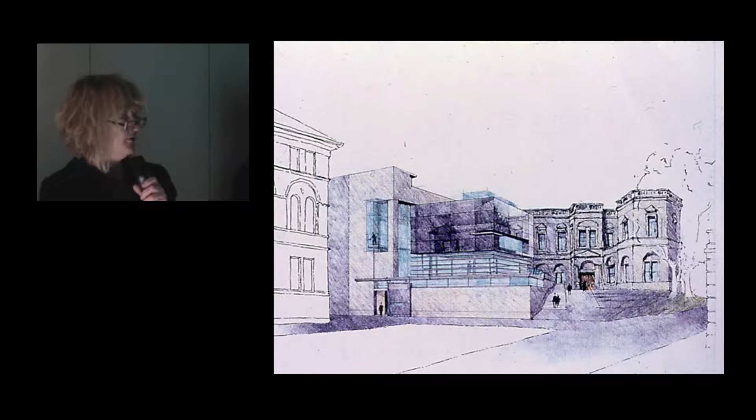In our first project in Trinity College, for a Department of Mechanical and Manufacturing Engineering, in developing the brief, there was an element within the programme that didn't have to be ground-based. So we took that element, which was an acoustic laboratory, and raised it above the podium, making a symbolic gesture to the campus in terms of this particular department. And at the same time as we were developing this project in Trinity, we were also working with structural engineers in the development of motorway bridges. And what we found through that work was the capacity of large-scale structure to influence space.

This is the entrance porch of a school that we have completed in Galway. And what's significant for us, and why we're presenting it to you tonight, is that it holds 2 pieces, it frames 2 parts. One is the landscape, the groundscape, and the other is the sky. And for us, the interesting point of this place is that within our work, the issue of anchoring to the ground, to the topography, is critically important. And also that the relationship to the sky is the opportunity to allow animation, to make connections and to capture movement.

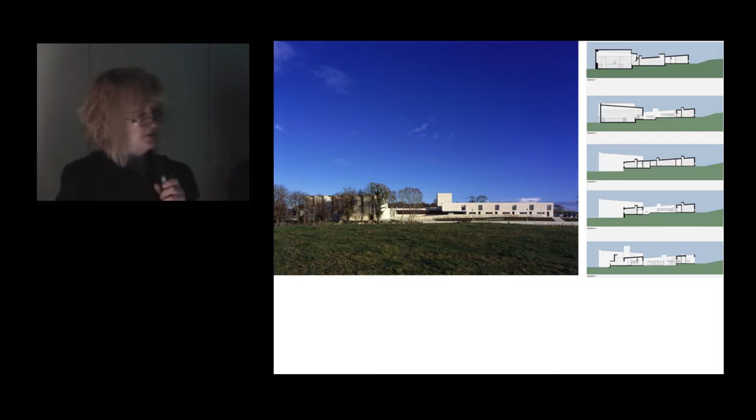This is the same school, but looking at another aspect of it. It takes the hillside and carves the topography on the ground, and also carves the topography of the roof. And in the project, we brought the space of the landscape into the body of the school itself. In this image, this is really dealing with very restrictive budgets in essentially radically important landscape locations. And what we have found is that the choice of the construction is critically important in the making of the space. And sometimes the construction method is the starting point in terms of design.

So essentially tonight, we are focusing on our project in Milan, the Bocconi University in Milan, because we feel that it amalgamates these issues that I've talked about in terms of grain, symbolism, major structure. So we will go through in detail tonight the Bocconi project.

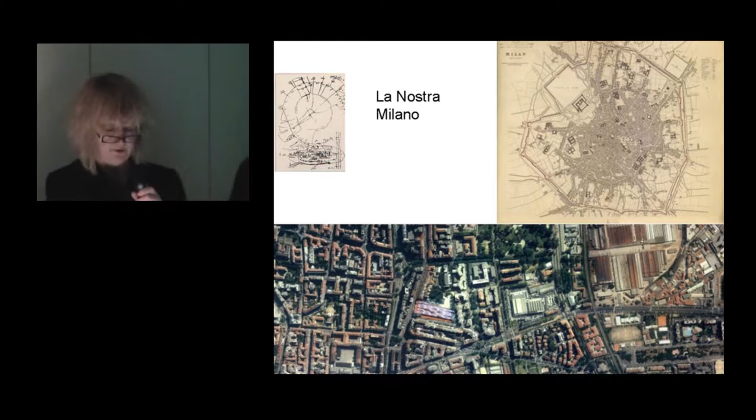The title La Nostra Milano, it's not meant to be proprietorial, but Yvonne was just mentioning that we've worked in Dublin most of our practicing lives, and the prospect of coming to a new city and building a building in a new place as foreigners was very challenging to us. And what we felt was that in order to make a building of this place and in this place, we had to somehow take ownership of Milan as a city and let it get under our skins, so that we were no longer strangers to the city. So what we're going to tell you is a sort of story of 5 years' work in the city, but trying to touch on the key preoccupations that we have in our work.

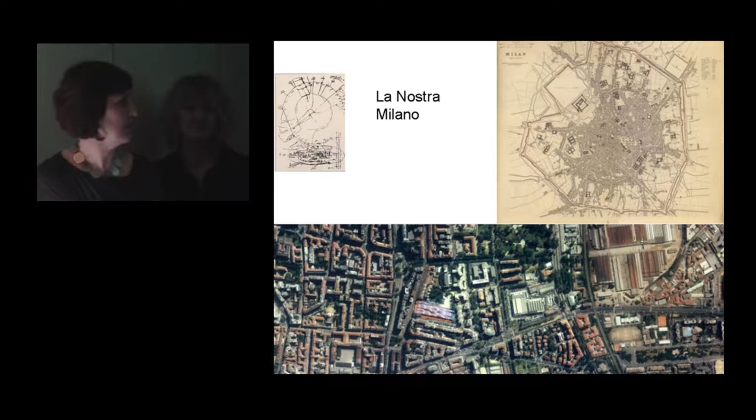The site for the Bocconi project, this is our competition model set into the context of the city. It's just outside of the Spanish Walls, about 20, 25 minutes walk south of the Duomo. Unlike Trinity College, it's not a gated university, and we were one of 10 competitors, and we're really honoured that Laurent Boutouin has attended here this evening, because he was one of the competitors and made a beautiful project, which I'm sure he felt should have won. But we're really happy that he has come here this evening. All of the architects that were part of this competition were architects whose work has inspired us hugely in our own working lives. And just describing this process of coming to Milan, not just as a tourist, but with the challenge of trying to make a building.

And before we came, we obviously had a brief and had done some work, and there were things in the air in our office, independent of this project, really. And the things in the air referred to this interest in sky, what we call skyscape and groundscape. The Sverre Fehn Venice Biennale pavilion on the left, and the Burren landscape in the west of Ireland on the right, somehow describes what we mean.

There was an interest that we had in that kind of potential interstitial space that could exist between the groundscape and the skyscape. The possibility of making a perforate roof which might hover over worked ground, and that one could make space which didn't have boundaries, was something that came up in other smaller projects, but somehow was relevant in this project.

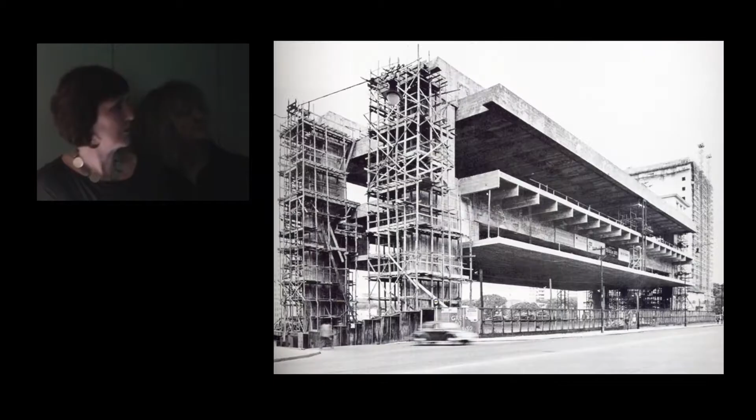And because of working on the motorway bridges, we also became really interested in structure and the infrastructural capacity of architecture, or the infrastructural capacity of structure to release space, not just within a building, but within the city. And the Lina Bo Bardi São Paulo Museum was a building that we found really inspirational prior to Bocconi, and we also went back to look at this project during the Bocconi project, because she made an urban space in the undercroft of this fantastic 80-metre span. It's post-tensioned beams from which the gallery spaces are hung.

And just because we were in Paris, we put in this project for Les Magasins Généraux, because we were one of, I think, the 11 firms who entered this competition. And the project we made in some ways connects with what we're saying, where we thought about trying to make a public space to continue the park, and to make the roof of this concrete frame building into a public space. It's not unlike the scheme that we saw today, actually, where we saw the winning project, in the sense that we were focusing on the roof as being public space and filling the undercroft with shops.

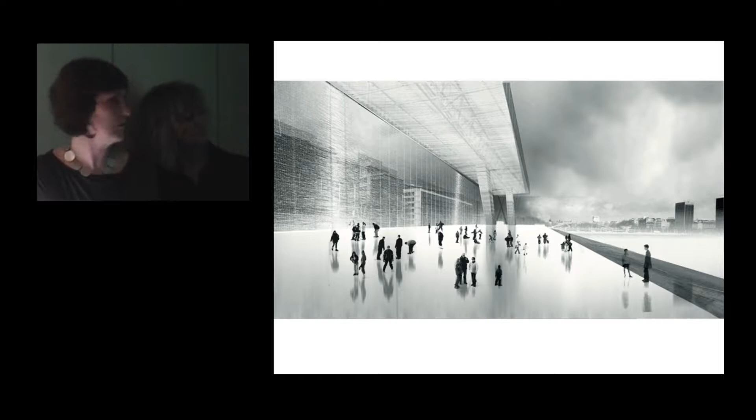And at the time that we were invited to do the Bocconi project, it was 10 times larger than anything that we had ever done before. And we were making this small but very important building for us in University College Dublin, a new urban institute, which is about 800 square metres. The way that we were investigating this project was with a very thin structure of concrete piers, which work in one direction, which stratified the programme in terms of layers of privacy required, and stitching in the other direction a structure for roof lights, which would take light deep into quite a compact plan.

We found that spatially there was a real surprise that making space in a strategic way as opposed to a compositional way led to a sort of open-endedness which we really enjoyed. And that was in our pockets, so to speak, when we were given this huge challenge to think about the Bocconi project.

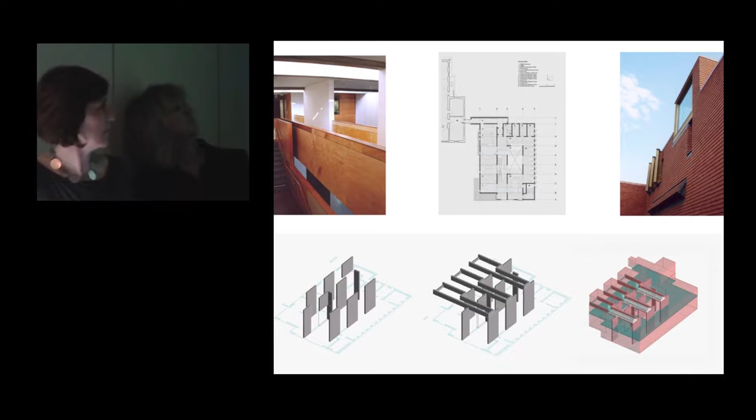So these are the sketches that we came to Milan with, where we were looking at the site of the existing university and really trying to find what Yvonne talked about earlier, some kind of urban grain or urban measure, almost like music in a way, to see what could be the measure or the rhythm of structure or of elements that would give form to this program, which was for offices for 1,000 professors.

So it was in total 45,000 square metres of accommodation, half of which was supposed to be below ground, which was the reason for us looking at the Salk Institute and the way that Kahn dealt with the laboratories and sunken courts, and also looking at sunken churches in Ethiopia, and the fact that one could make a high architecture even below ground and make ritualistic routes which would connect ground level to spaces below ground.

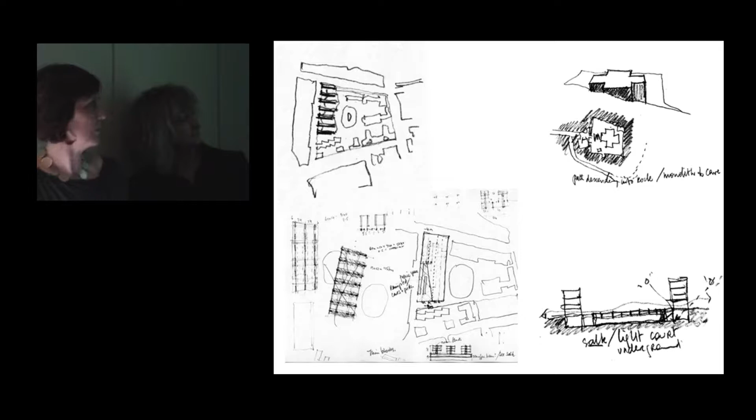And in searching for a structure, we were interested in this idea of making the offices into a plate which might hover over the ground of the site, and that was what these first sketches were about.

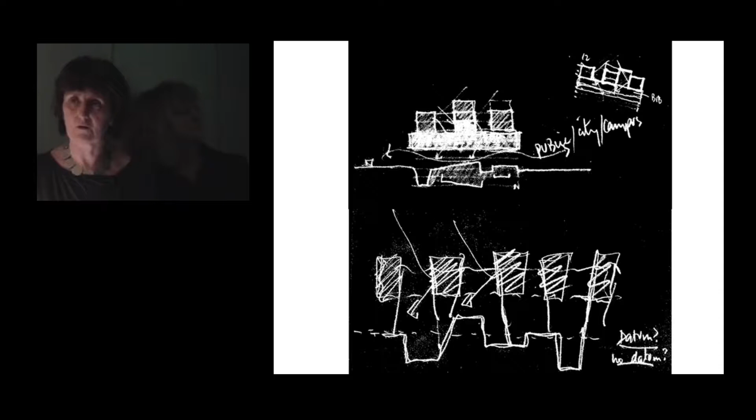And we were also thinking, I suppose, having worked in Trinity College and also in University College Dublin, and having worked in the city, there was this whole issue of, well, what is the university within the city? And what is the ideal relationship between university and city?

And so the question was, could we take the landscape of the city right through and into the campus, through the building, that the building would act almost like a sort of filter between city and campus, and that we would work the ground and the accommodation that was below ground, that we would in a way try to eliminate the boundary of that accommodation that was supposed to be below ground, and that we would allow those spaces to erupt, and that we would take courts deep into the ground to bring light with them.

And going back to the Sverre Fehn image or metaphor or sort of inspiration, we started to think about offices for 1,000 people being like an inhabited light filter, that one could make a huge roof through which light would come and make public space below. So this was us trying to get a measure of how many floors and what size were things on the site and how would they fit.

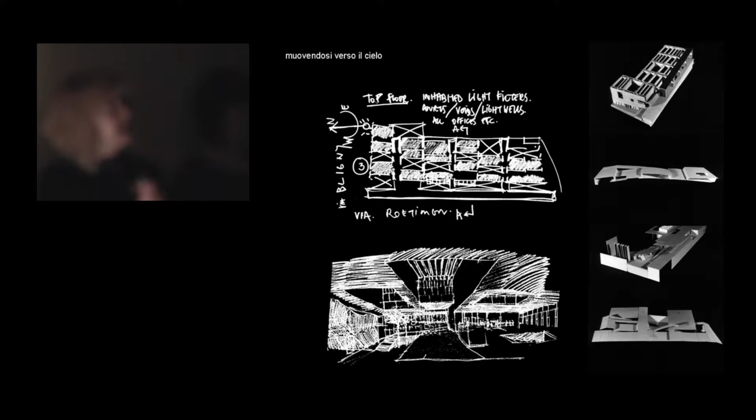We looked at two strategies. The first was: could we bring the city deep into the section by having an anchoring here and bringing the bars of space across, anchoring onto what we developed as the library component? But we found then that we had structure interfering between the office spaces and the lower spaces.

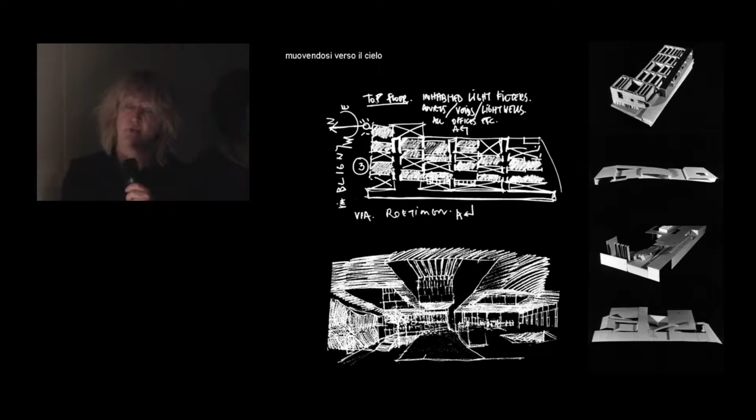What became a kind of crucial moment in the design of this project was to say: what if we took the structure that, instead of relating to the ground - if this was the manipulated lower level - what if we took the structure of the offices and hung them from the upper levels above?

It meant that if the beams, the main structure, were placed at this level, we could hang the offices, and sometimes have long hangings of offices with a low soffit, and short hangings here where you'd have a higher soffit.

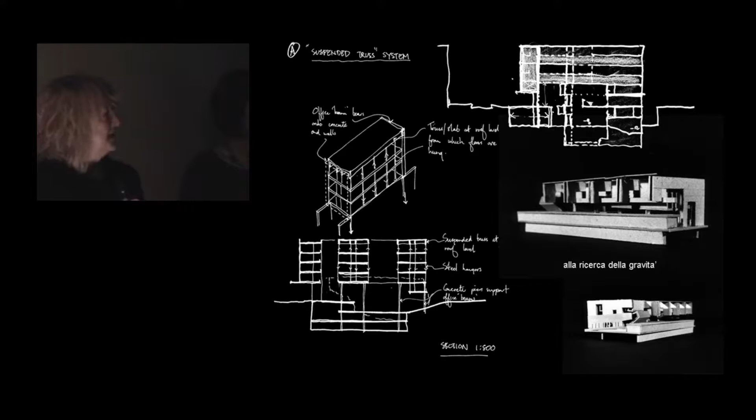So architecturally you had ground-hugging spaces and sky-hugging spaces, and the architectural component became the void between the two ideas. So we get an idea of upper structure - these steel ties which hang down, from which the plates of the offices are hung.

This is Shelley referred to this beautiful floor of Milan, this kind of range of stones which forms a continuity. And the other issue we refer to is that Bocconi University is not a gated space, it's not a walled enclosure, it takes part in the city of Milan.

In terms of strategy, there was one key element in the project that we interpreted as the major possibility of connection with the city, and that was the big room, the Grand Salon, the Aula Magna for 1,000 people. We decided that by placing the Aula Magna in the toughest, hardest position within the city...

What we had was a type of shoulder, if you like, in terms of structuring the space, but really the way we described it was that we would place it to be visible, to make a connection to the city, and that it became a great window to Milan, which I'll describe in a minute.

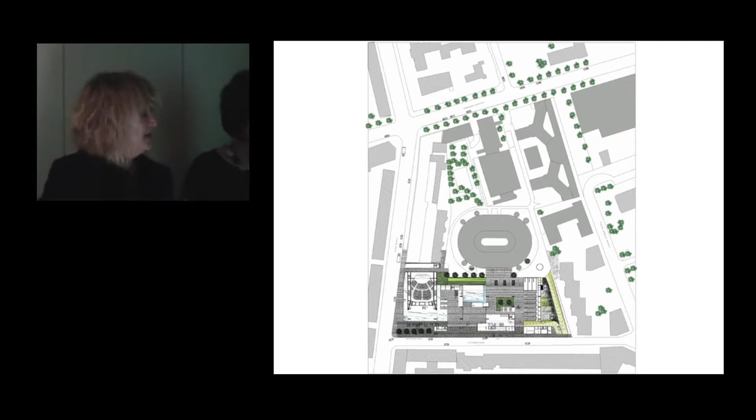So we have this very busy street here, which was noisy, had the trams, was very narrow, not the place for entering. What we organised was that we'd see the main element of the project at this position, but we'd delay entrance, bringing it down the secondary street, with a deep finger of space which brings you to the main coordinating position of the plan. I'll bring you to it now.

Essentially what we did: this is the main noisy street, this is the quieter street at the side. We have the main entrance position on street grade. If you are a student, you continue through onto the campus.

If you arrive to go to the Aula Magna, you arrive at this position, go down the grand staircase to minus 5 here, and then enter the Aula Magna at this position. So when you're in this white space here, you're 5 metres below the busy city above.

That allows us to control movement, but also make a connection. It does two things: one, that space relates back out to the city in the form of the aula, but it also brings the city in. So when you're in this position, your relation to the city is framed.

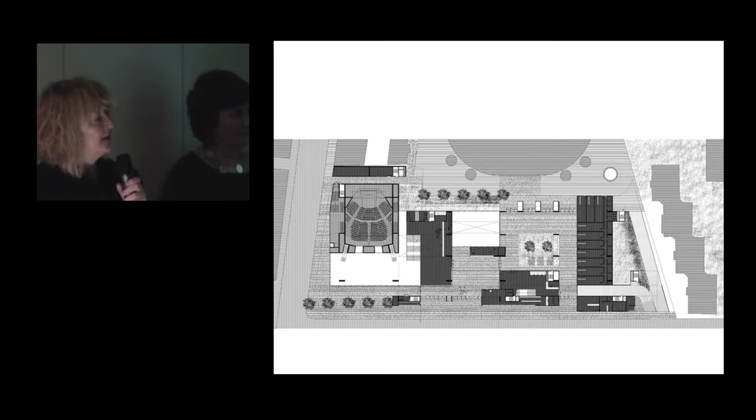The other issue we had to deal with was these 1,000 professors. In the same sense that 1,000 is like a mini city, the professors arrive and have their grand entrance here with their staircase, so they're corralled into this position.

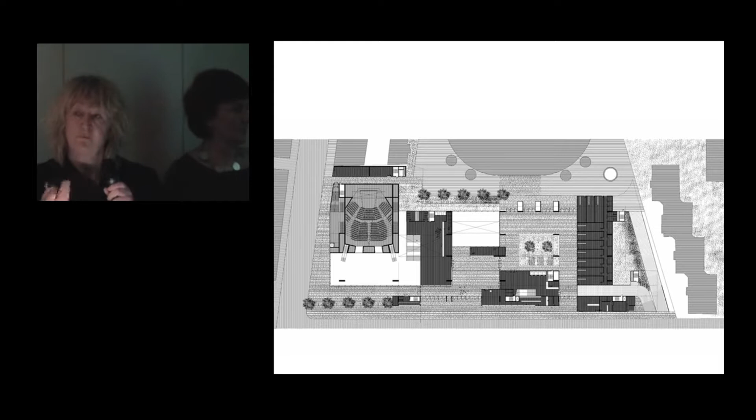There were two elements in the brief we felt were important. Of the 10 departments in this Bocconi University, we took the library element of each department and grouped them together so they formed a type of canopy, a linear space held above as a type of armour.

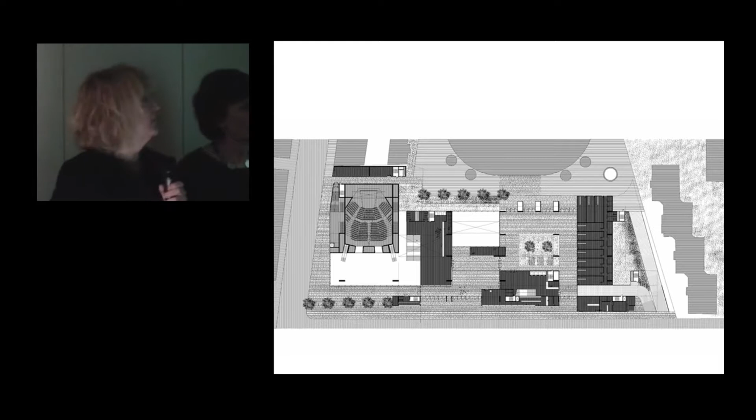Here we have the next strategic, infrastructural move: every 25 metres you had these bridges, which are diaphragm wall structures, which allowed us to set up the rhythm of the office level, but also allowed us to make a labyrinth of movement in the north-south direction. You've got these as constant every 25 metres, and corridors which change and move depending on the requirements for the offices.

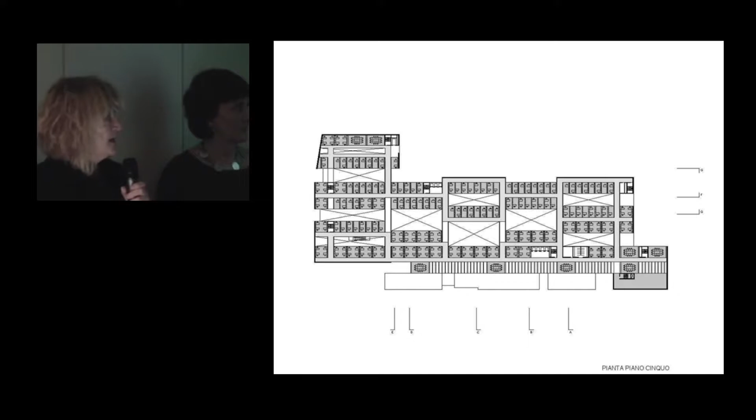And as we moved them, we were able to make these scoops of space, which were the voids that brought light down to the lower level.

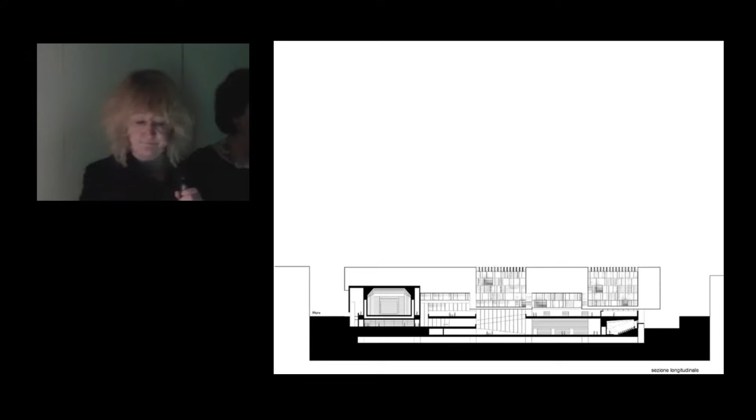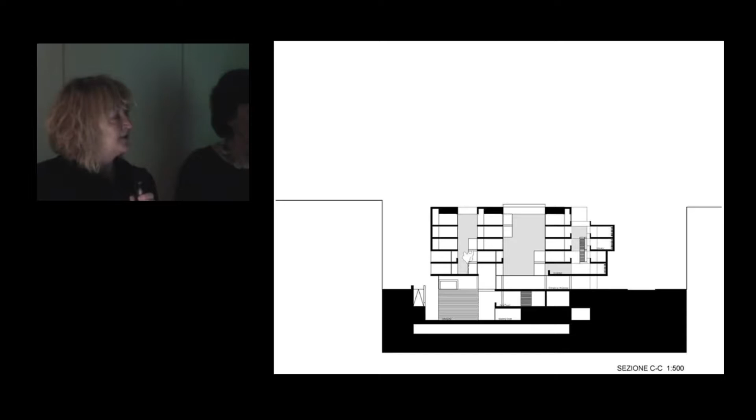In this other section, you see the grand staircase for the professors, which continues up into the space we call a type of nave. So you get the main body of the building, the separated library, and this cut space between the two, with the street level coming through and carving down to the -5 and the -9.

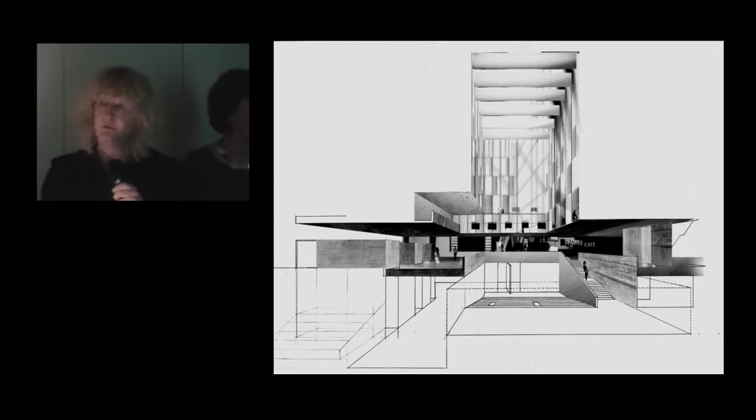This was a perspective we worked on during the competition, really trying to describe that trap space between the hung soffit of the offices, reaching up to bring light down to these deeper spaces as we carve down to the conference level.

So this is street level working through, with the soffits forming this, and the next perspective showing the potential of the hanging structure. By obliterating the structure at ground level, moving it to an upper level, and carving on the lower level below, we had this potential for a variety of space.

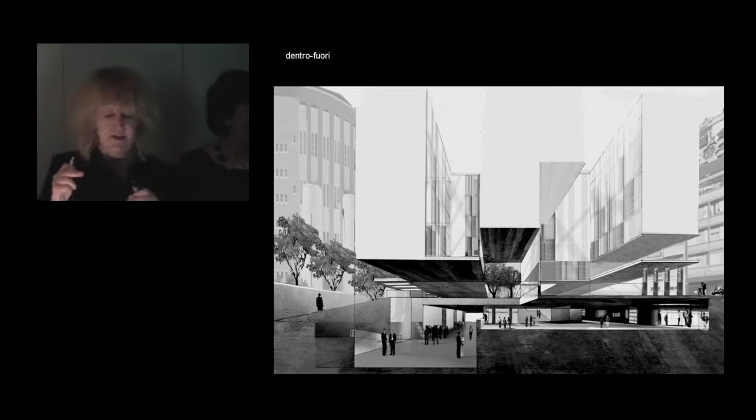You've got the university with the ramp coming down -5, -9 to the lower level. This is the -5, which is below the street level here. So you get this series of connections, not only horizontally, not only vertically, but diagonally.

What things changed? We arrived with a strategy, but we hadn't got a language. And as Shelley described, we arrived as a type of architectural detectives to this place to see what particular things could be harnessed or used or mined to become part of this project.

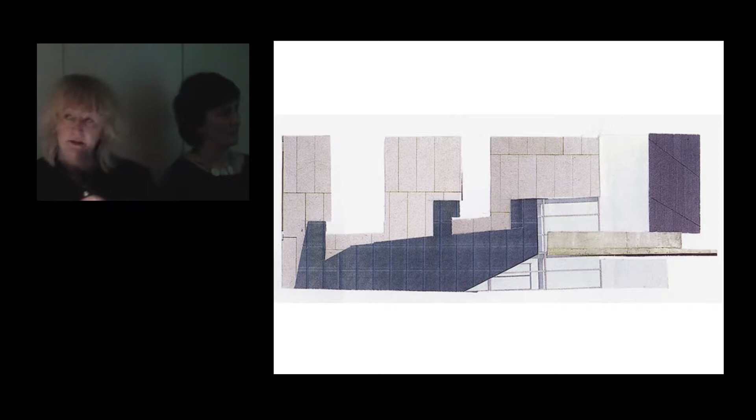In the original struggle with the accommodation and the brief, we had the Aula Magna as a single story part of the project buried deep in the basement. We felt, like in the project I showed earlier at Trinity College, that there was an element within this project that needed to tell a story to the city of Milan — that the reason Bocconi were making this project is they wanted to reach out symbolically, architecturally, to say we have a formal presence, we are contributing to Milan as a city, and we have something to give and something to receive.

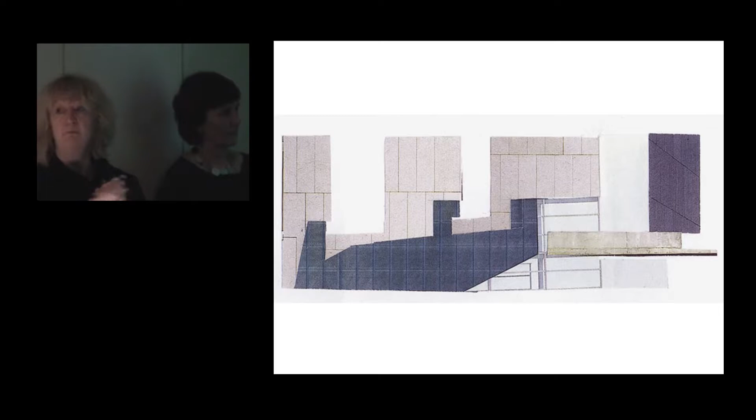So what we did is moved the Aula Magna from a normal, ordinary place in the basement to being expressed on the very edge of the site where Viale Bligny and the university touched. This great eruption of the Aula Magna meant that it was legible, and we call it our great window to Milan — this point where the Aula and the void under the Aula was actually making a connection.

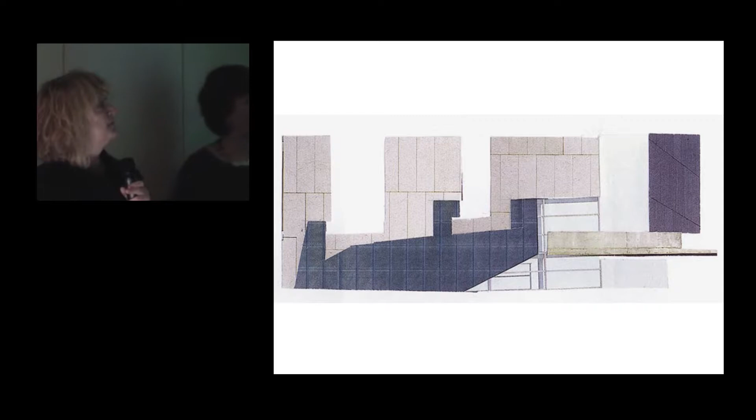This is a collage showing the separation of the library component acting as a type of shield on the side street. We allowed the bars of office space to come through, expressed with their voids onto the Viale Bligny. Shelley referred to various contemporary architectural references in Milan, and this type of expressive use of form by Moretti was something that gave us the courage to move in this direction.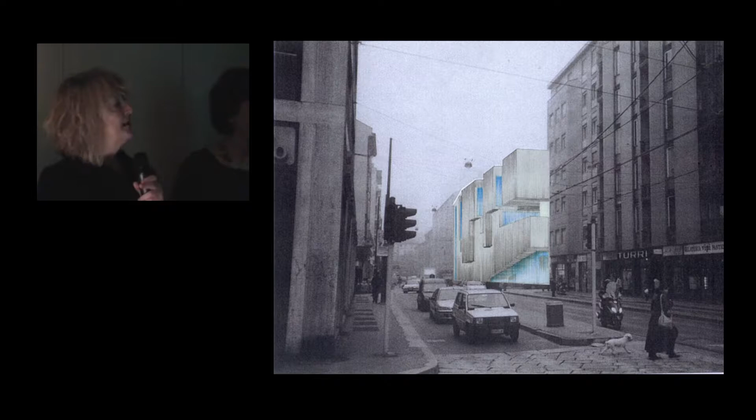So here was the main connection to Milan. Shelley described it as a kind of foggy, misty, highly used, workaday place in Milan, and this was our site. Our first pencil studies and inlays show the bars of the offices expressed, with the Aula Magna rearing its surface and structure up to allow you to make some connection.

There's one place on the plan that's really significant, a tiny little move — a small laneway which, when coming down the Viale Bligny, allows you to slip into the campus. We're interested in that whole hierarchy of streets, lanes, public space. By keeping this little slip route and laneway, not only does it allow another connection to the city, but it also allows a bar of light — the south light actually penetrates deep onto this other street through that crack.

And this was an important collage for us in the competition, because it was a description of our building on a wet or foggy day in Milan, that you have this as our main contribution, this window to Milan, with the aula form clearly expressed with the garden above.

And this was the 1 to 500 model, which is part of the presentation for the competition, where you see the carved lower groundscape with the courtyards bringing light deep below. You get the aula beginning to erupt the space below, and this is the combination of the 10 library rooms to this crust, this hard crust on the side street.

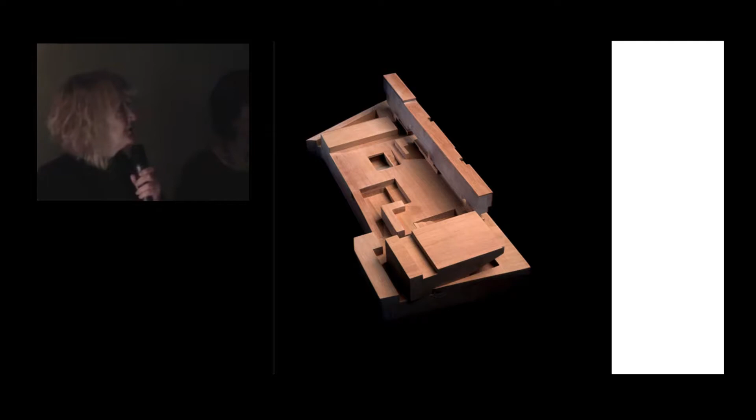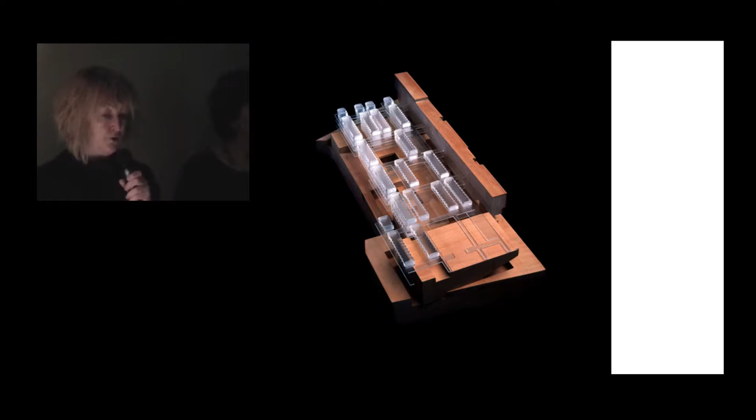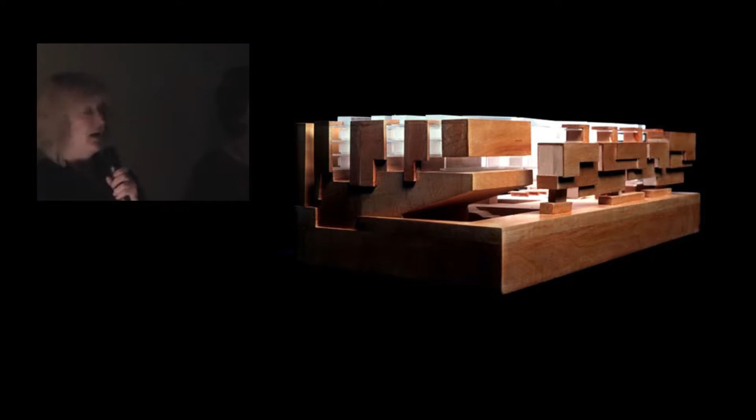You get the bars of the offices with the diaphragm walls, corridors beginning to show the courts between these bars of offices, the position of the roof beams, and it coming together as a model. The side, the library as a composite, the entrance being delayed coming down the side street to this position, and the alley.

There's an amazing space on the roof of the Duomo in Milan, which is the walkways at the higher level on the stone, which is a fantastic sense of theatre and drama, where people are walking through the buttresses. And we felt that this level of drama or theatre could be incorporated in our diaphragm walls, where when you moved across the site, you had these connections not only from the offices above, but also the spaces below. So you had the conference and the offices having this kind of not only educational but spatial relationship.

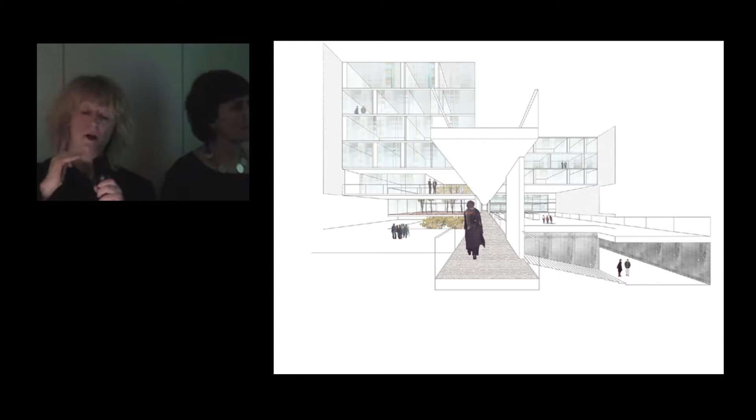And we felt that the two issues of student life and professor's life, that not only was there a blurring of the datum between city and university, but also vertically, that you could have students and professors linking across the section, so that the world of the professors was connected to the world of the students, and the world of the students vice versa.

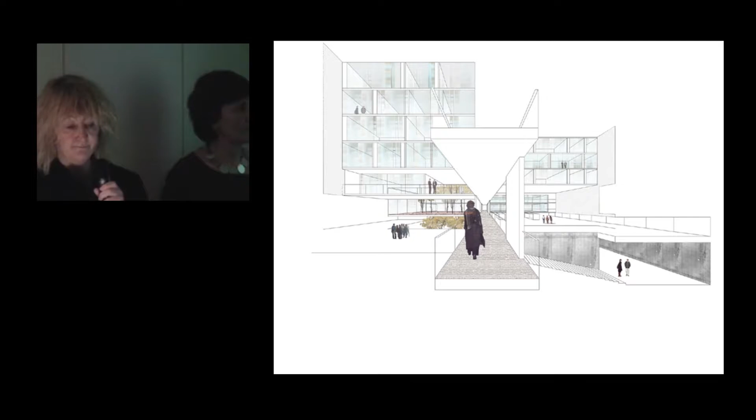So we won this competition in 2002, and as every architect knows, there's always a worry about what's going to happen. How will we survive, and how will the project survive? And I think we've been very lucky, because the university decided that they didn't want us to amalgamate with an Italian office, that they would give us the support system that we needed to do the project in Dublin, which is what we did, except for construction stage, obviously.

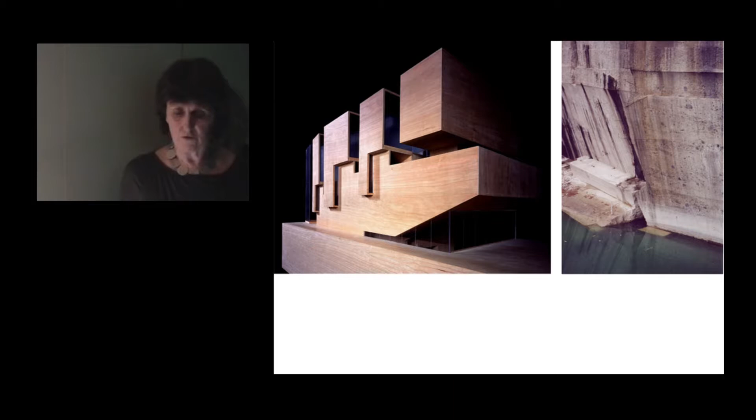And I think, I mean, it wasn't all one big rosy happy story like any construction project, but we feel in the end that the project has survived for this very reason, that the client had the determination to support and to push and to build this building.

And when we had to move very quickly from competition stage to reality and choose materials and I suppose try and touch that note that we were referring to in terms of our observations and perceptions in relation to the city, we were asked very, very soon what kind of stone we would use, and we immediately referred to this stone which we had seen around the streets, and went to the quarry, which was a fantastic revelation for us, because we hadn't been to a quarry where it's mined from the inside out as opposed to the outside in.

But it was just also seeing the stone in its raw state, that it somehow had the same character as the way it was used in the buildings. It had that same kind of monolithic character. And Yvonne actually refers to this stone as being like geological concrete, which it is. It's like when you make a cube test of concrete, when you're cutting through the aggregate. It has that same kind of quality.

And so we were given the team at competition stage. We worked with RFR in Paris as engineers, but when we won the competition, there was an Italian team appointed by the university, essentially. And the thing took off, really.

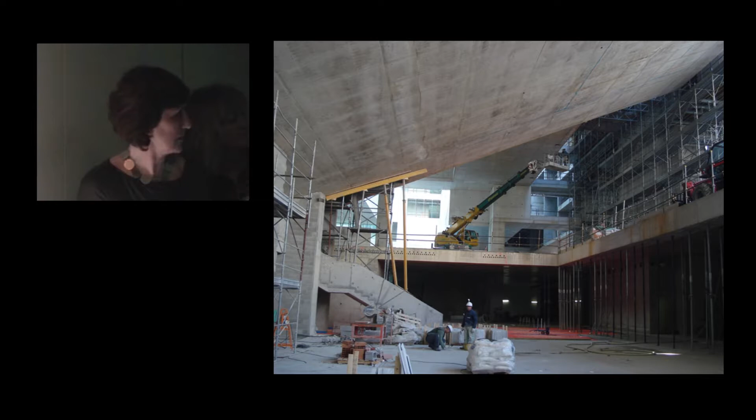issues of everything actually. This study model shows us looking at the idea of making a series of contours, the ground, the walls, the ceiling, which would deal with the seating, the acoustics, the lighting, and that it would feel like some kind of piece of geology, which in some way would have this sense of the way that the quarry walls were cut.

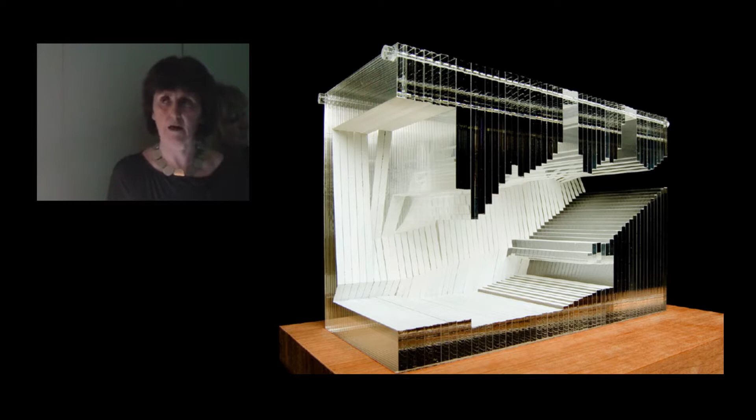And I suppose our main problem was that we really felt that a timber lining wasn't appropriate in this project because it's just so heavy, and somehow making a light lining didn't seem appropriate. And we looked to the Sydney Opera House, and Utzon's writings as much as his sketches in relation to the lining of the Sydney Opera House. While it was going to be in plywood, he talks about the contours of the landscape of the exterior being taken into the landscape of the interior. So we're making this in stone.

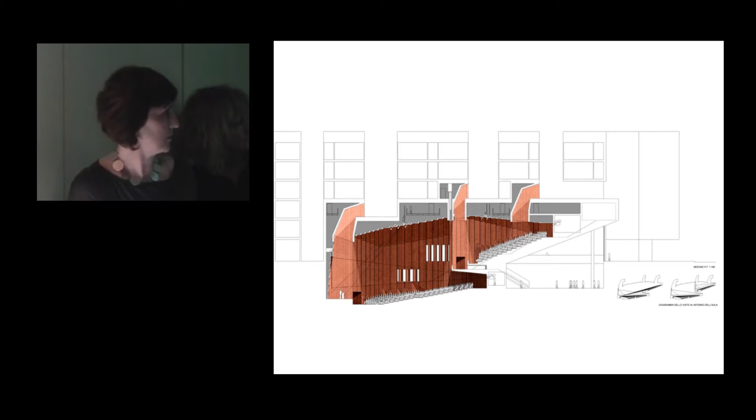This was the competition drawing. We were hedging our bets here, which could be terracotta, it could be timber. But the important thing also was that we were stitching up into the belly of the offices above, making these light scoops, because it will be used primarily for conference. And because we were asked to make this divisible into 2 rooms for 400 and 600, we made a 2-tiered Aula Magna with the potential for division between the 2.

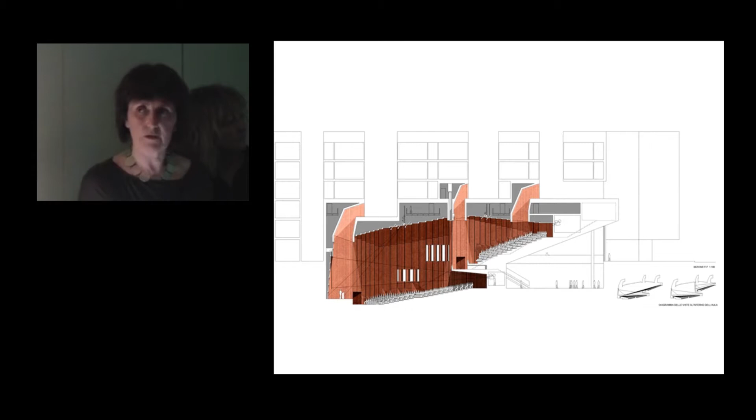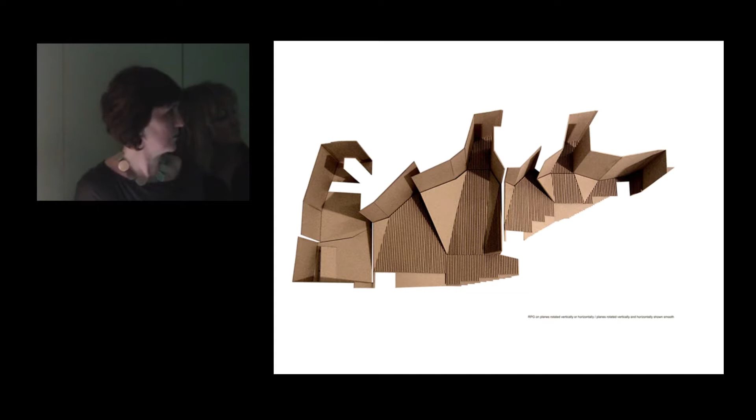And this was the project we did for the Venice Biennale, where again we were looking at a way of folding the walls, and within the folds and the cuts we would deal with the acoustics and the lighting, and looking in detail at the relationship of this room to the street, to the undercroft, the upper and lower, the light scoops, and abstracting the offices above.

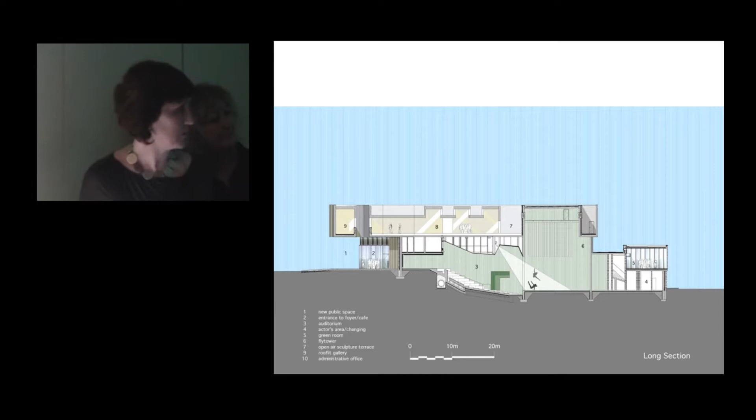And just because we're showing one project, we want to refer to other projects which happened during the course of the whole Bocconi project, because it's been 5 years. And this is a theatre project 1 hour from Dublin in a town called Navan. And it has taken from the Bocconi project in some ways.

It's quite different in the sense that it was designed to be a courthouse, which was to be completely separate from the theatre below. So we've used the natural topography of the ground to make the theatre. And we've made another world quite separate and quite different up above, which is to be the world of the courthouse.

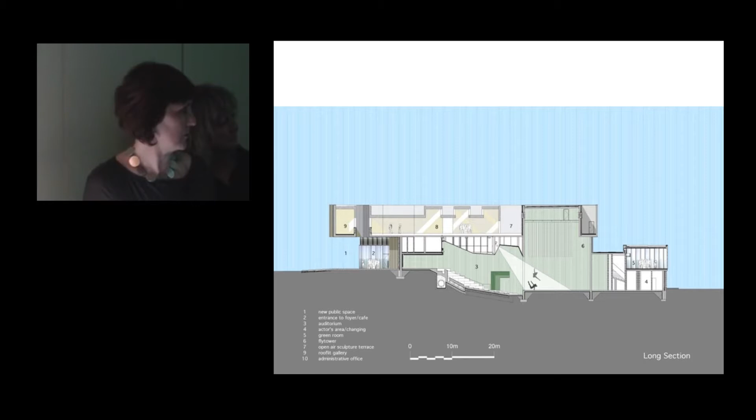And the facilities would be shared between the court and the theatre, and the fly tower would be housed within the section. It was also to do with layers of foyer and public space before entering the theatre. But it's trying to make a theatre which again had a sense of mass, using concrete walls, and using the studies that we had done for Bocconi, which were discontinued for various reasons. We actually used that system in this theatre and made a concrete floor, which we covered in terrazzo, so it has quite a weighty presence.

And the other challenge during the Bocconi project, but also previous projects, was how to make glass walls which have some depth and some richness. And in quite an economical way, we've made a glass wall in this building, which, by combining structure with white glass and clear glass and frosted glass, does have this sense of being a kind of a veil, as opposed to just being a single layered window.

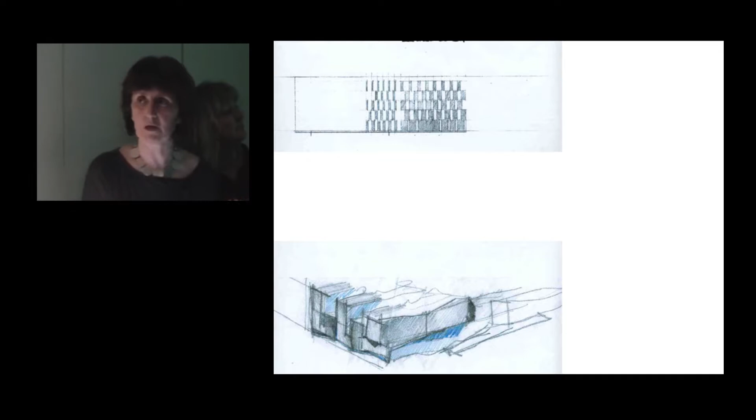So going back to our Bocconi project, this sense of the carved exterior, and moving on to this beginning of the veiled interior of the courtyards and the wish to make quite a different, lighter, airier, reflective kind of world within, in contrast with the exterior. And these were early studies looking at that.

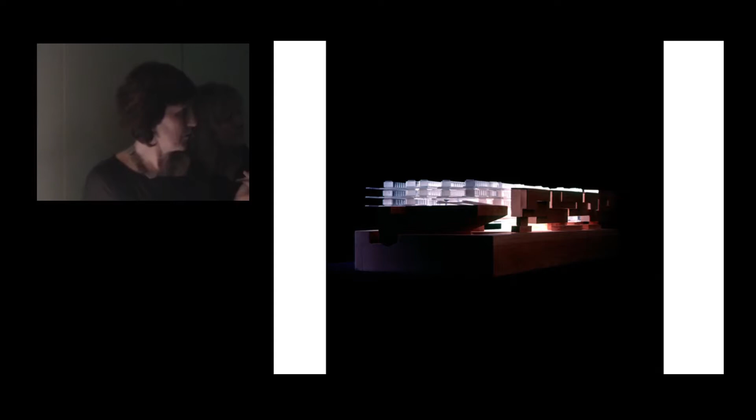And Yvonne referred to the library building, the only part of this building which breaks the tyranny of the office floor plate are these interconnecting double height and single height volumes, because we felt that the library should be a place where the sort of regimentation of the floor plates should disappear, and that somehow it would encourage some kind of social interchange. So the architecture of this three-dimensional screen is quite different to the architecture of the offices. But looking at how we were trying to get this sense of moving under something that's hovering through this crack between two solids, but into a lighter world behind.

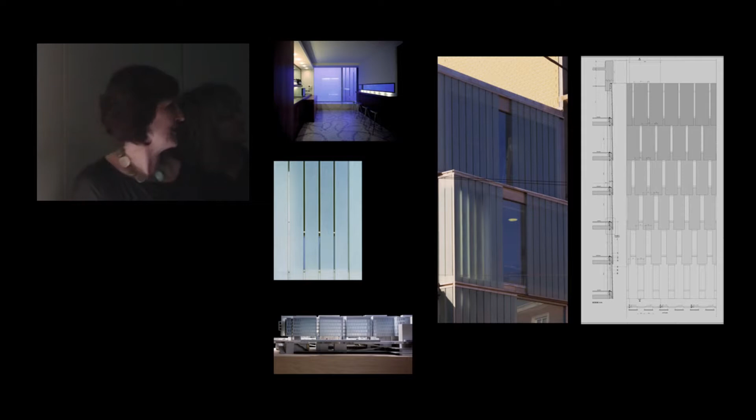And the sort of encouragement that small projects we had spent months working on and slaving over in years gone by, we're wondering why we bothered, because nobody seemed to appreciate it, least of all the client. But you find that the years and years of this research feed into a big project, because without doing these, this is a small cinema project where we used a double layer of glass planks and sliding glass walls. And when we won the Bocconi project, our client came to see this building, and we were able to talk about this thing of making glass screens have depth.

And so we had the kind of fluency to be able to move and think about making this glass facade in the courtyards of the Bocconi project, where we made these hanging glass shingles which act as environmental protection as well as privacy protection for the professors.

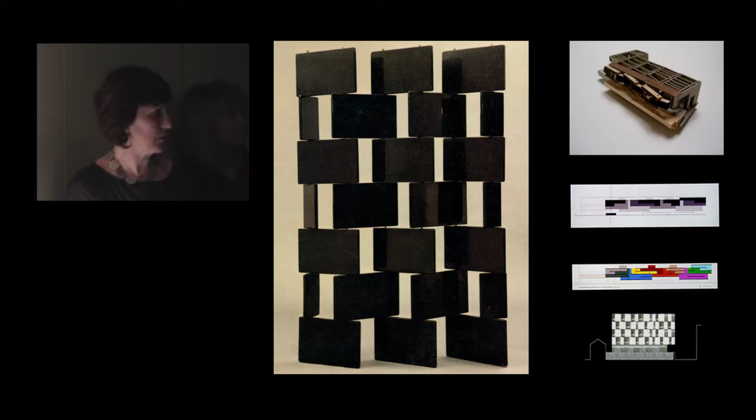And again, just to try and stitch in other projects into that, this was a collage study for the public building that Yvonne was speaking about, overlooking St. Stephen's Green. And we won't go into it in detail, but just to say that that kind of weighty language of making walls is something that we have taken from the Bocconi project, I suppose, using a completely different language here in Dublin, where we used a solid outer skin and tried to use glass flush and glass recessed to make three-dimensional and dynamic what is a facade to an office building.

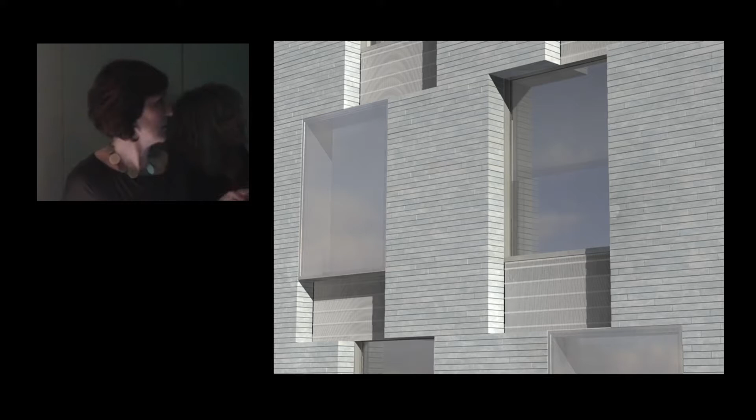And just looking at that in more detail, dealing with environmental issues of ventilating grills, sliding windows, fixed windows, and making that kind of screen to the city. But back again to this wish for weight and mass at the ground level, and back to Il Broletto and the scale of the columns and the scale of that structure.

But also, at a certain point, we were worried that the undercroft of the project would be gloomy and dour. But when we went to this quarry, when we went literally in through the mountain, into the interior, into this amazing man-made space, which is the cut geometric voids of the quarried space within, with this huge window to a lake and to a mountain beyond.

We felt that to have that sense of carved space in the undercroft of Bocconi would be a wonderful thing. And this is -9. This is one of the secondary conference spaces, but just how again in Milan the light penetrates buildings in a different way to Dublin, and the scale of spaces that were emerging during the course of construction, and the need to make big moves to give legibility and to place you within what is quite a large building.

So using these big ramps as big beams, again spanning between the columns placed at 25 metres, so you go from 0 to -5 to -9. So trying to take the world of the university deep into foyer and conference levels, as well as trying to take the world of the city into the building.

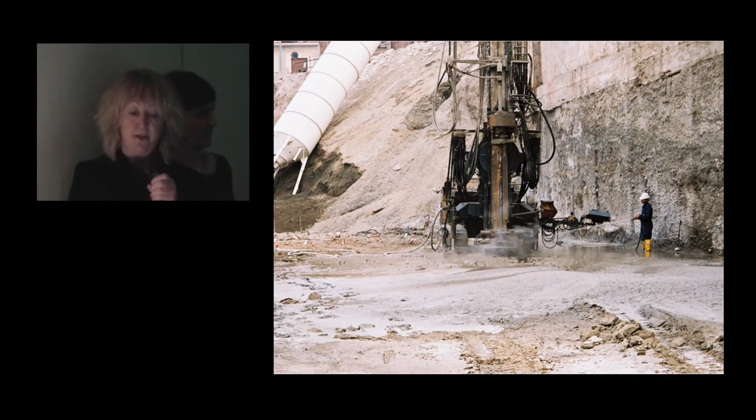But on the edge of the wall here, before all of this happened, into the edges of the site, were these, sorry, I'll just go back to them there, were in 5 metre pours. These great walls of concrete were carved down into the earth, using the earth as permanent shuttering. So we get these 5 metre strips of retaining walls, which hold the site like a basin.

And then you see these points here, which are groups of tie rods, which are pushed into the earth at a 25-degree angle for 30 metres to hold these walls into position. So these walls as 5 metre strips with these anchors of tie rods pushing into the earth to hold the whole basin of the container.

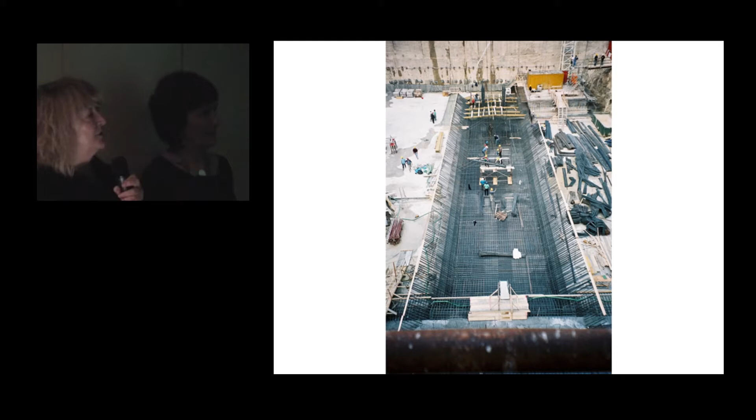And here's someone cooling the pile drivers as it's going into the earth. And here you see these 5 metre pours of concrete which have been driven right down. You now see the water table level oozing through at this point, and you see the points of the rods.

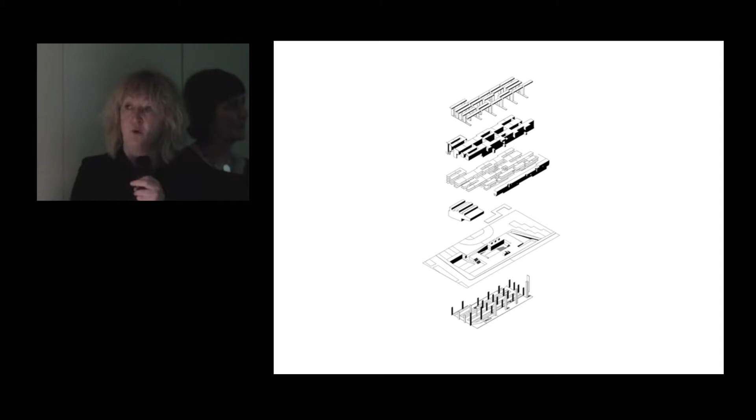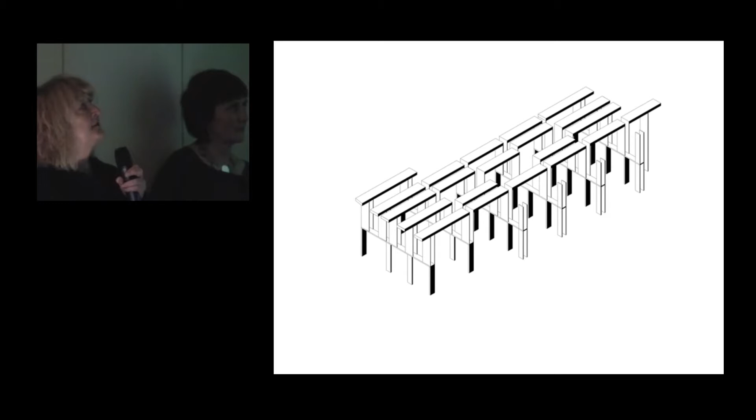Beginning now, this is the steel for underneath the feet of the great diaphragm walls, which are happening every 25 metres. So you see the scale of the operation, the retaining wall and the steel to receive the structure. And just as a resume for you, you have the car parking level below, the carved earth of the courtyards, the beginning of the aula, the plates of the offices, the spaces carved for the offices, and at the very top, the structure to hang the offices.

And this diagram, what's interesting for us is that in terms of the plan, and Shelley showed that project in University College Dublin, which had the structure going north-south and the roof lights going east-west. What's interesting for us in the organisation of these diaphragm walls is that on the ground plane, the movement was north-south, so they are switching to take the movement in that direction. On the upper floors, where they're dealing with the offices, they become twin diaphragm walls which hold the corridors.

So here we have the lower great columns. We have these columns then turning into diaphragm walls to hold corridors, and then we have these walls continuing up to become the surfaces on which the great beams hang.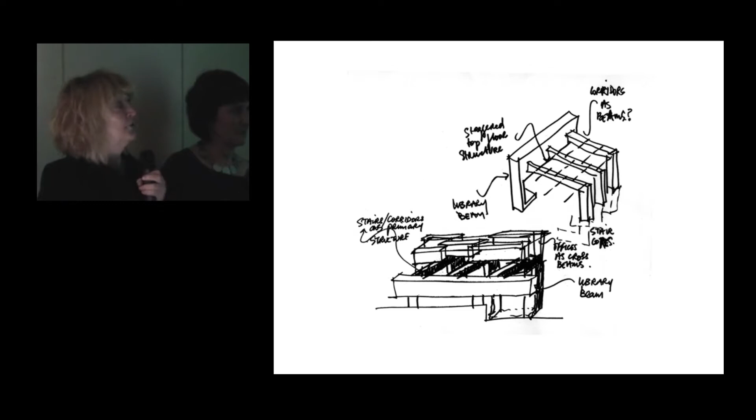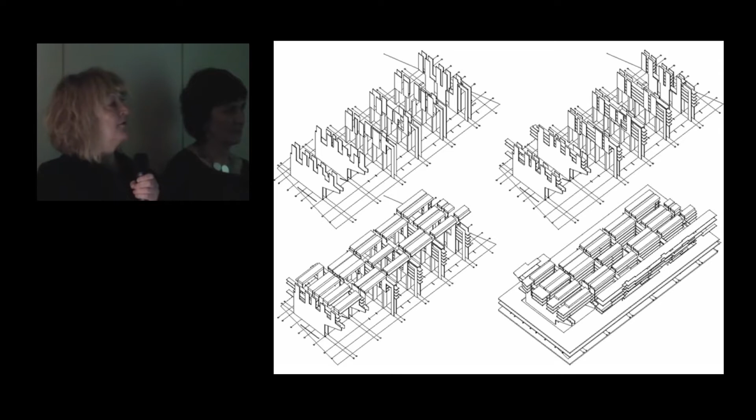And this was an earlier stage where we were looking at transferring the beam at the level just above the public space. And we didn't do this because we were aware of structure at this point. Rather than liberating the two spaces, we had structure at the very point that we didn't want it.

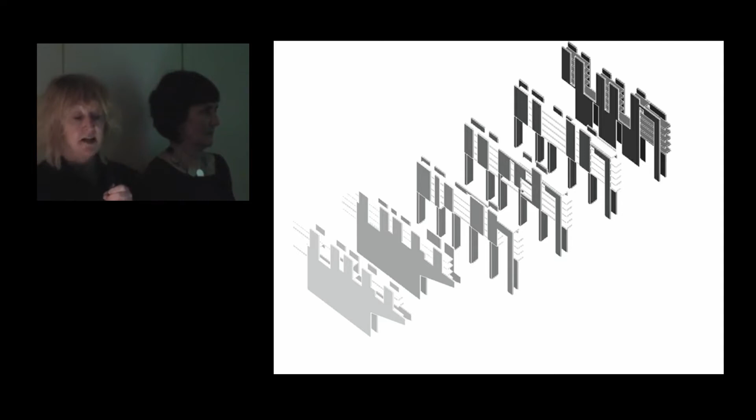And this diagram of the structure shows the twinning of the walls by the aula magna, the columns facing north-south at the lower level, the corridors filling in, the structural beams up above, and stacking the floors of the offices.

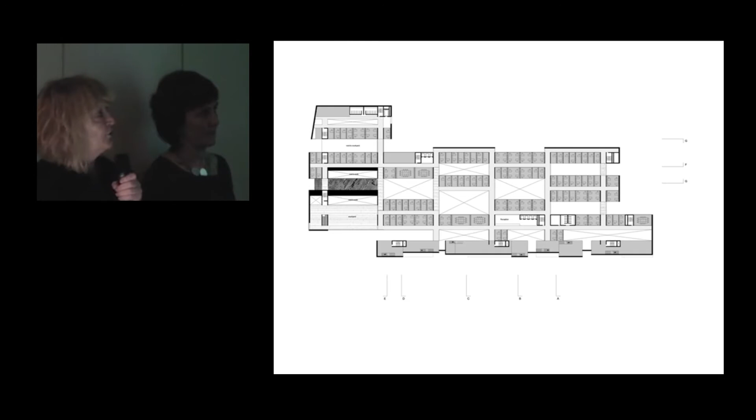And just this axonometric diagram of the structure, it's very interesting for us because these are at 24 metres, they're 3.6 metres wide in terms of circulation. They take all our services across this grid, but also they were asked to be versatile. So each of these elevations had to be modified as each of the labyrinthine cross corridors reached them. So no two elevations are the same. Each of those diaphragm walls not only had to be structured to take the roof, but they also had to take the cross beams of the offices.

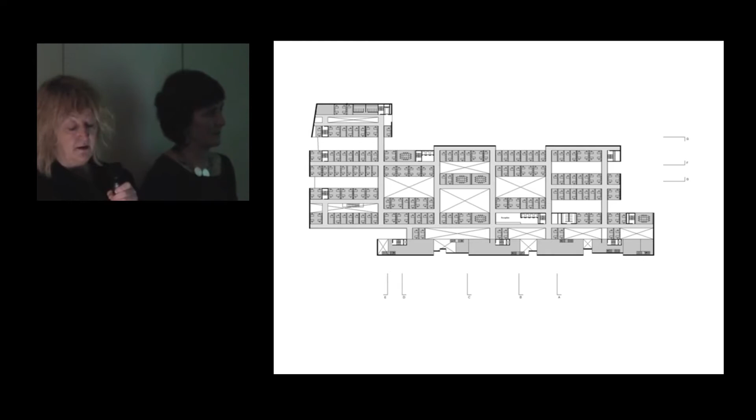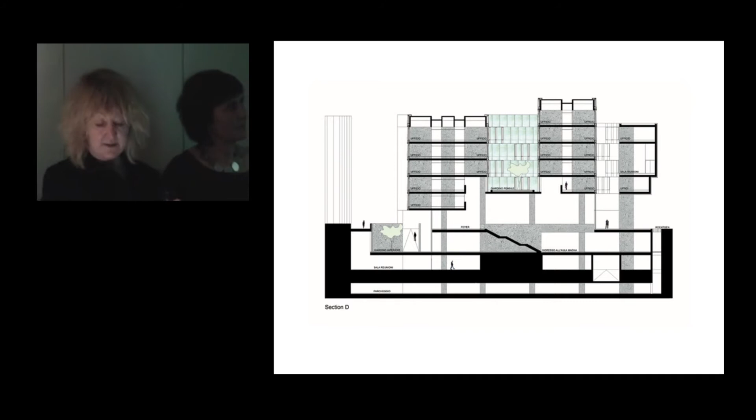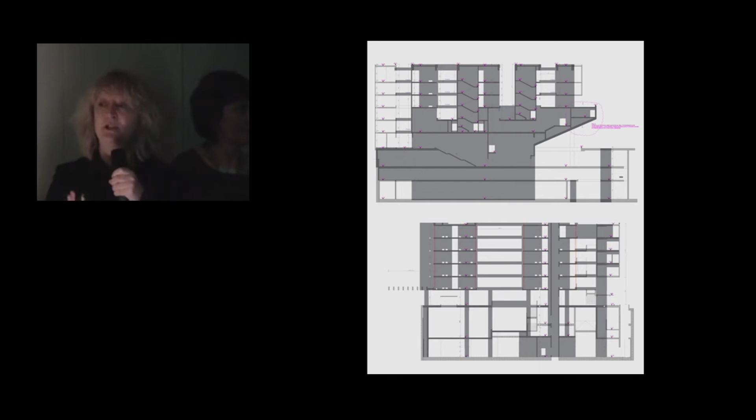It was very interesting. Shelley was describing the fantastic support of the structural engineers. When we did the competition, we were a bit worried about a 22-metre cantilever, and we had 2 columns underneath just in case it needed it. But as soon as the structural engineer was working on it, he removed those columns, saying that if he had to do them, he'd be the laughing stock of Milan. So it was good for us that this capacity for this 22-metre cantilever wasn't interrupted by the 2 columns that we had intended there.

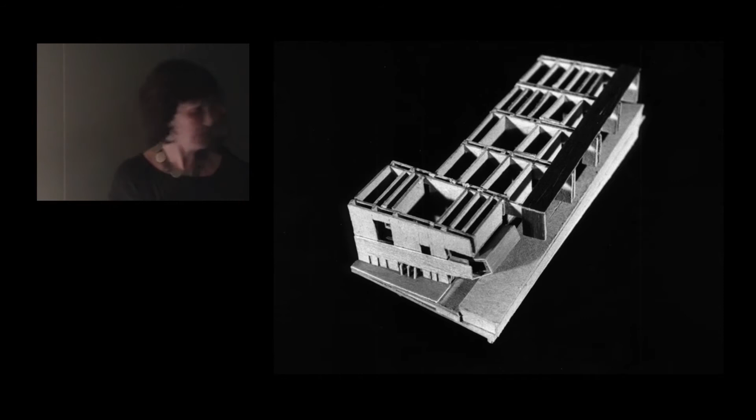So, in dialogue with gravity, we were trying to suspend, as we've said, a whole world above ground to make a space which would be between that world, the beams of offices above and the city below. And just seeing how that came about, we're looking up at a roof beam which spans between the diaphragm walls. This is the 25-metre span, and you start to see the tie rods hanging, waiting for the floor slabs of the offices to go in.

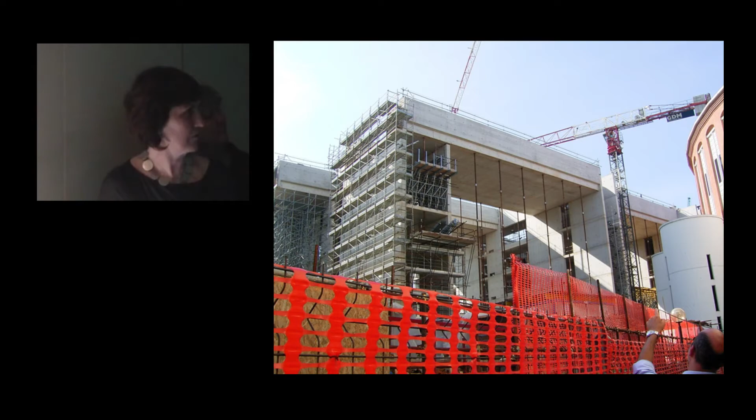A really crazy way to build, because they had to. We were so shocked, something we hadn't thought about. They had to build the formwork right from minus 12 metres right up to the roof to support the roof beam, pour the roof beam, take it all away, take away all the scaffolding, and put in a separate set of scaffolding for each of the floor plates. So there were two huge works in terms of scaffolding and the sequencing of the forming of the structure, and how that starts to reveal itself on the site.

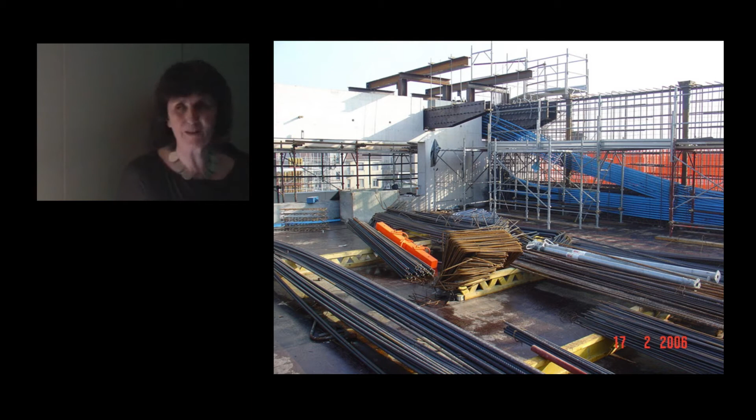And just to mention the kind of effort that went into this project, there were moments when we were genuinely humbled when we came on the site and just saw the effort and the scale of concentration and dedication and work that was needed.

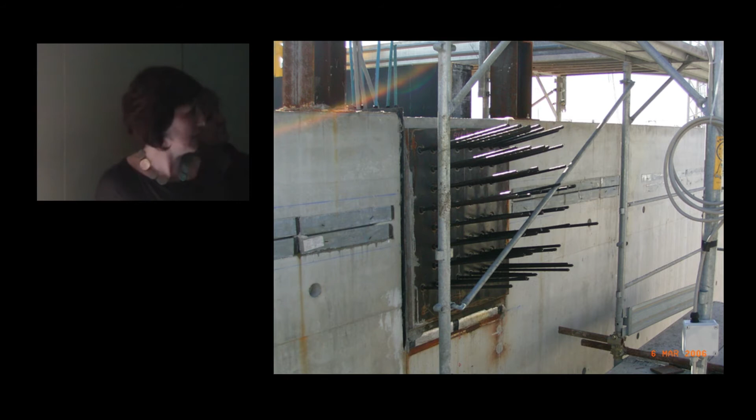We're in a roof beam. This is the post tensioning, and then this is the top of the diaphragm wall. The roof beams are 3.6 metres deep. They house the servicing, and it's a composite of steel and concrete. This is a steel clamp waiting for the roof beam to join the diaphragm wall. And then the whole post-tensioning process and the monitoring of that post-tensioning of the rods, the kind of scale and quantity of reinforcement.

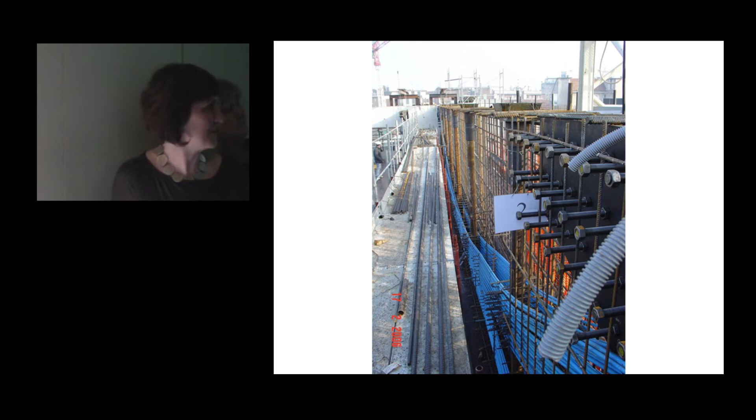And in the project, we brought some visitors - the Irish Concrete Society were the first Irish people to see this project, and they were so excited. It was really interesting to have a group of 20 very excited Irish engineers looking deep into the shuttering and oohing and aahing at the scale of the work.

What continually amazed us was the continuing invention at every level of the team of builders and engineers and concrete foremen. In a way this encapsulated it. We didn't want prefabricated fillings to the shuttering holes in the columns because they looked too plasticky. And the guy who was in charge of the concrete, he just drank espresso all day and smoked cigarettes all day. He suddenly realised that his espresso cup was exactly the same size as the hole for the shuttering in the columns. So they cast these little concrete dowels, thousands and thousands of them, on the side, from the espresso cup, because it just fitted.

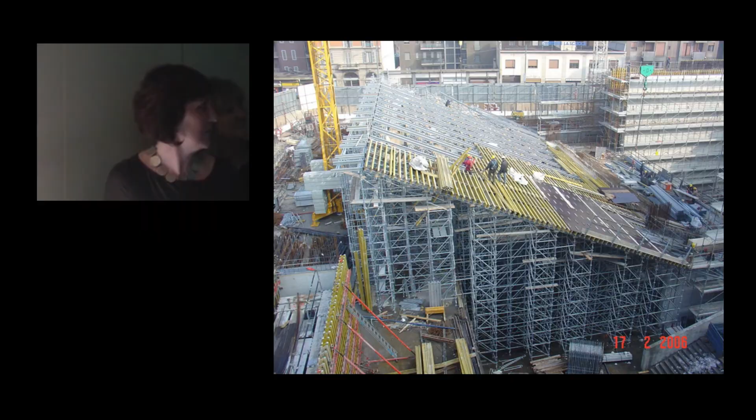And that was ongoing, that kind of continuing invention and imagination and skill. And again, just to finish, looking at the sense of the beginnings of the suspended soffits of the offices above, and the scale of the works and the scale of the shuttering required.

Here it's still up in one bay, it's down in the next, and that's how the whole thing was sequenced along the length of the site.